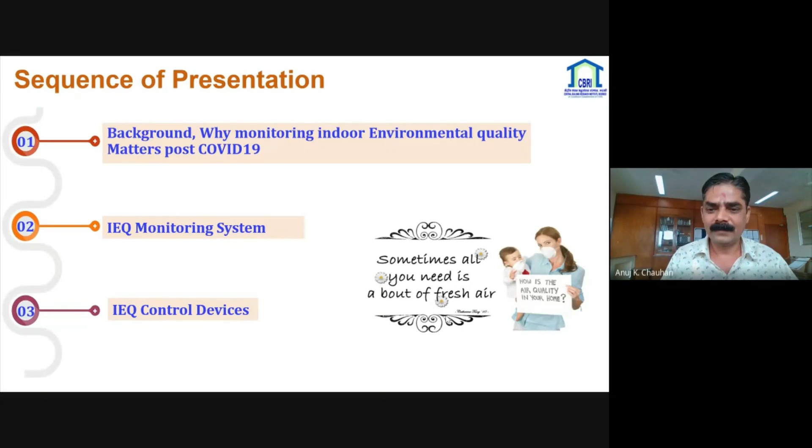Indoor environmental quality and indoor air quality are associated with one another. Indoor environmental quality basically has four main parameters: ventilation, lighting, acoustic, and thermal comfort, and indoor air quality is also associated with indoor environmental quality. If there is poor air quality inside the building, it leads to building-related illness and sick building syndrome. The main issue is safety and health of the occupants inside the building.

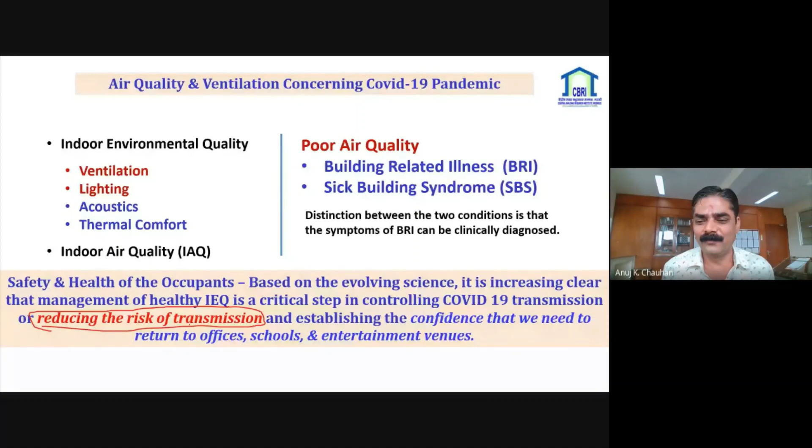It is increasingly clear that management of healthy indoor environmental quality is a critical step in controlling COVID-19 transmission. Our main target is reducing the risk of transmission, because most entertainment venues, offices, and schools were closed for the last 2 years, but the population is not confident about returning to offices, schools, and entertainment venues.

We cannot directly monitor the presence of COVID-19 in the air, but we can and already do regularly monitor a number of factors which affect the risk of viral transmission, such as temperature, humidity, particulate matter, and CO2, meaning air quality. The second issue is how the integration of cleaning and disinfecting practices, ventilation system operation, and indoor air quality measurement can provide a framework for the safe operation and occupation of indoor environments.

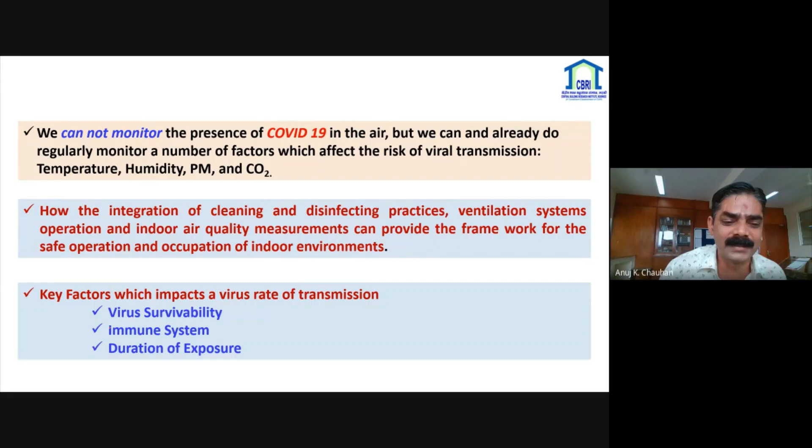The three main key factors of virus transmission rate are: first, virus survivability; second, immune system; and third, duration of exposure. This is basically a photograph showing the link between occupancy and the increase in CO2 level inside the building.

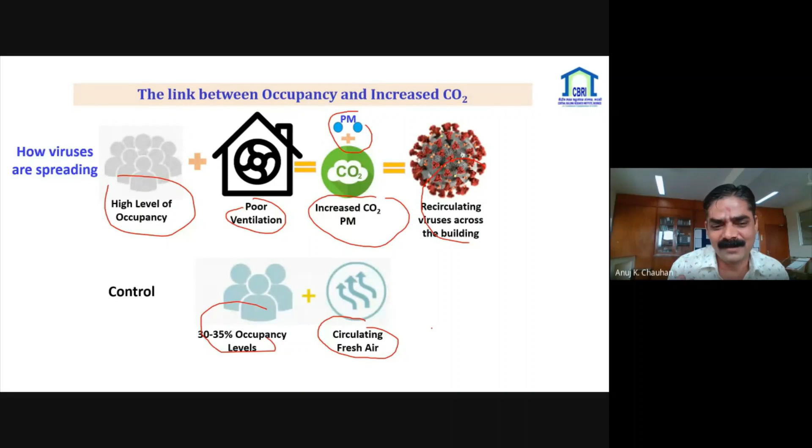It depends on occupancy. If there is high occupancy in the building and poor ventilation, the CO2 and particulate matter levels increase automatically, which then recirculates the virus more speedily in the building. There are two phenomena that are very easy to control the virus within the building: one-third occupancy levels, and circulating fresh air inside the building. These two principles are the main ways of controlling the transmission of virus inside the building.

Regarding air quality, according to WHO, most people spend 90% of their time inside different types of buildings—commercial, residential, and industrial—and approximately 70% of their time in homes. So based on virus transmission, monitoring is necessary based on air quality.

The main factor is that buildings contain a wide range of airborne pollutants that pose a risk to human health, including physical, mental, and social well-being. Therefore, indoor air quality is very important for houses and buildings.

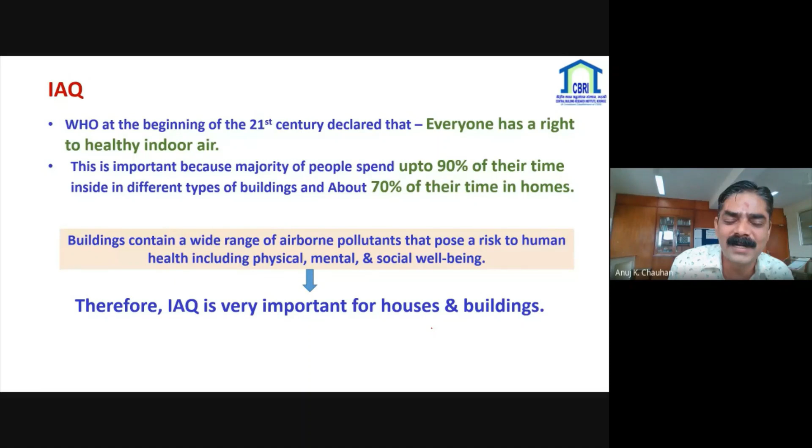This is the health effect based on pollution. Air pollution generates CO, SOx, NOx, ozone, particulate matter, volatile organic compounds, lead aerosol, and these pollutant parameters affect the human body causing respiratory illness, cardiovascular illness, cancer risk, nausea, and skin irritation. Also, water pollution develops bacteria, parasites, and chemicals, and these affect the human body causing gastroenteritis.

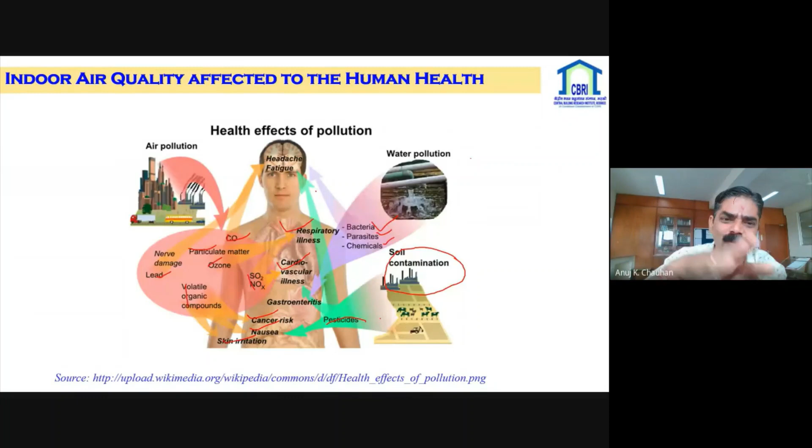Also, agricultural activity or soil contamination develops parasites and causes nausea and cardiovascular illness, and also headache. This is basically how indoor air quality affects human health.

Inside the building, there are so many sources that automatically make indoor air quality polluted with gases, such as carbon dioxide, a product of combustion and respiration—it's not a pollutant at the concentrations found in most buildings, but is an indicator of bio effluents and combustion. Second is carbon monoxide, a product of incomplete combustion, and sulfur dioxide, a product of combustion of fuels containing sulfur, particularly coals. Nitrogen dioxide is also a product of combustion.

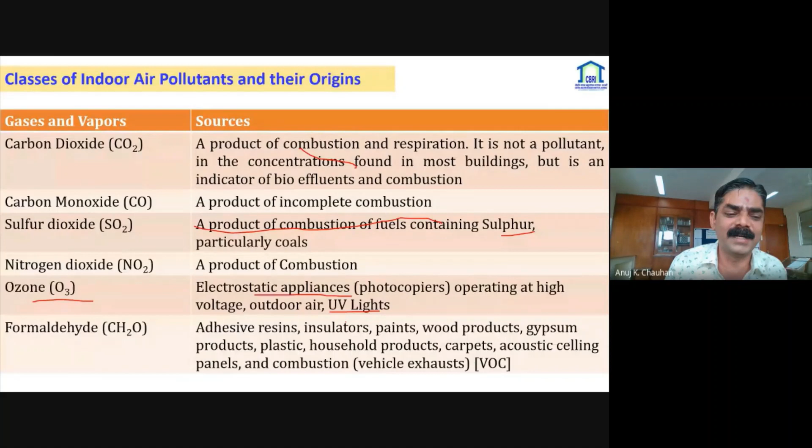Ozone is mostly generated by electrostatic appliances, photocopiers operating at high voltage, outdoor air, and UV lights. Formaldehyde comes from adhesive resins and paint; carpet and acoustic ceiling are also sources that generate formaldehyde. Particulate matter, a product of combustion, cooking, candles, open fires, tobacco, boilers, etc., develops into PM10, PM2.5, and PM1 inside the building.

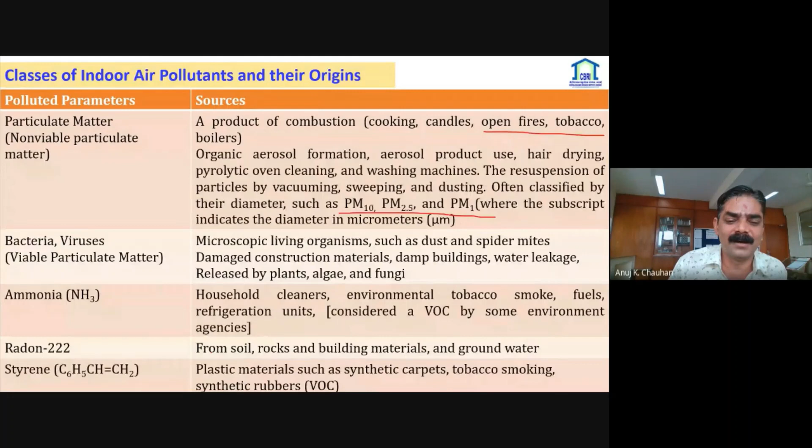This is the acceptable range of the pollutant, because we have defined in the last 4 to 5 slides based on any system, any product. If you want to design a product, you need an input parameter. So these slides are linked to the design, before designing the product or instrument, the pollutant parameter according to the standard. So the range, acceptable range according to the standard: WHO standard, ASHRAE standard, OSHA standard, and EPA, Environmental Protection Agency based pollutant parameter.

So the main parameters are PM2.5, PM10, ozone, total volatile organic compound, CO, CO2, and formaldehyde. This range is defined based on WHO, and a few parameter levels are defined by ASHRAE, and also all parameters are defined by OSHA and EPA.

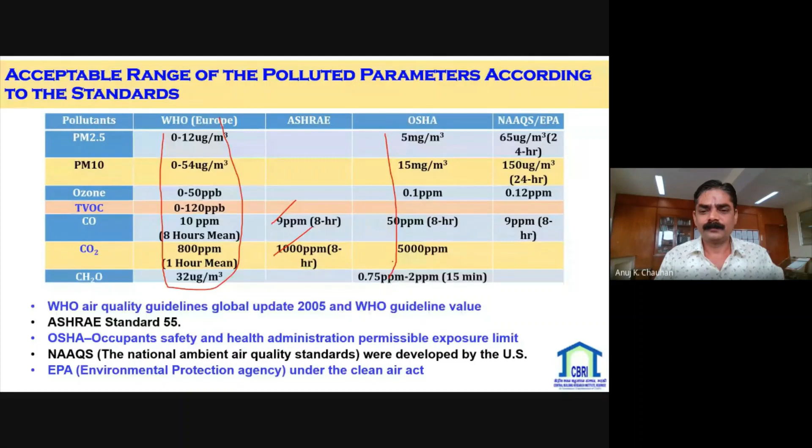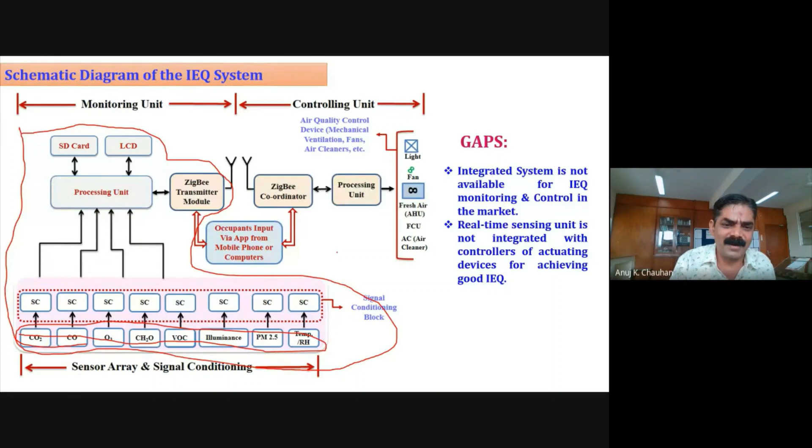Basically, most of the scientific community does not integrate this directly, but we have a necessity to follow the standard or guideline according to the standard. So we have followed the IEEE standard, and based on the IEEE standard, we have defined and already developed this system. This is the STIM model, Standard Transducer Interface Module, and the other is the Network Capable Application Processor.

The STIM model consists of a sensor array and signal conditioning. SC means signal conditioning, integrated with the processing unit, and the transducer electronic data sheet.

Most systems nowadays integrate directly to a micro SD card, but don't save the data directly in bulk mode. But in our research, we have developed a separate sensor module, meaning CO2 data is saved separately to a defined particular space on the micro SD card.

And this is the local display for monitoring the parameter, and this is the transducer independent interface. The transducer independent interface is based on the IEEE 802.15.4 standard. Basically, we have linked here Zigbee communication, and the second part is the controlling unit.

The controlling unit controls the indoor environmental quality parameters based on light, fan, fresh air handling unit, fan coil unit, and air cleaner. And we have followed the IEEE standard for the development of all these, and this is the unique feature of this product.

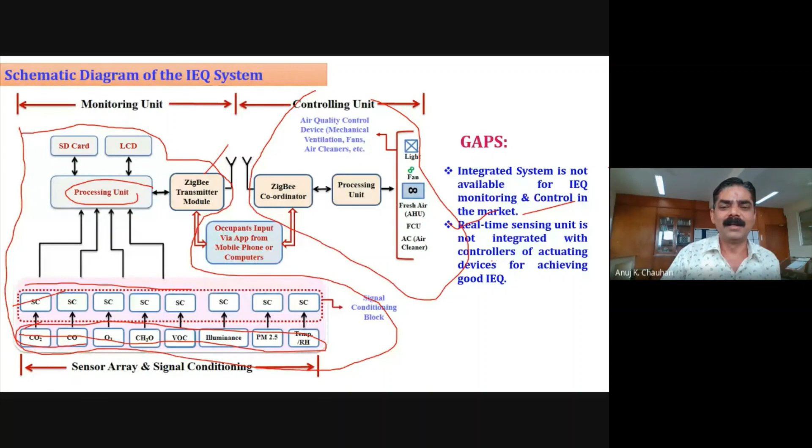This is a sensor array, basically a group of sensors like CO, CO2, SOx, NOx, ozone, total volatile organic compound, formaldehyde, temperature, relative humidity, and particulate matter.

Basically, most gas sensors are transducers that detect gas molecules, producing an electrical signal with magnitude related to the gas concentration. Nowadays in the market, 5 gas sensing technologies are available: electrochemical, catalytic bead, semiconductor, photoionization, and infrared gas sensor.

In this work, we have used mixed mode sensors. So a few sensors use semiconductor technology, a few use electrochemical sensors, and one is the infrared sensor. But we have chosen the sensor based on energy efficiency, based on accuracy, and the main parameter is the response time of the sensor. So we included 3-4 parameters here, and based on these parameters we have chosen the sensor for developing the indoor environmental quality monitoring and control system.

And first, the basics of the electrochemical sensor. Basically, an electrochemical sensor operates by reacting with the monitored gas and producing an electrical signal related to the gas concentration. This principle is common to most of the sensor array. And basically, an electrochemical sensor consists of 2 or 3 types of electrodes.

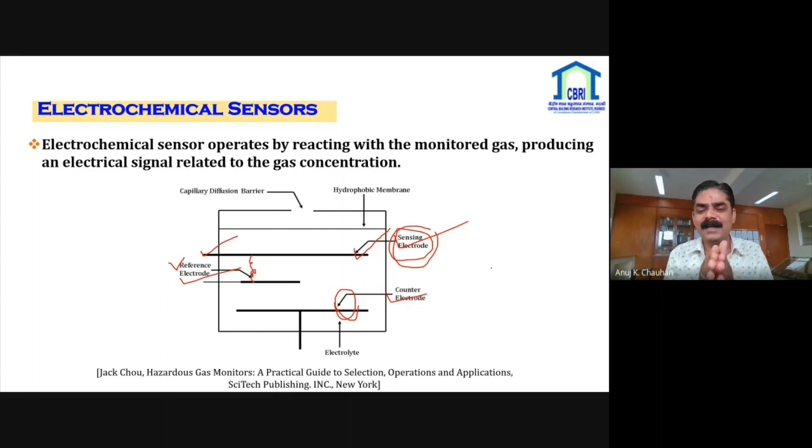This is the basic principle of the electrochemical gas sensor. After some time, sensor output is saturated, then a jumper is made between the reference and sensing or working electrode. Some sensors require a bias voltage applied between the reference and sensing or working electrode, and the sensor is ready to be used immediately in the next situation, otherwise it takes a few hours.

The main advantage of the electrochemical sensor is that it's very linear, with good selectivity, excellent repeatability, and good accuracy. The electrochemical sensor is very specific to a particular gas, with no disturbances or interference from other gases affecting the result, and it requires very little power to operate. In fact, its power consumption is the lowest among all types of sensors.

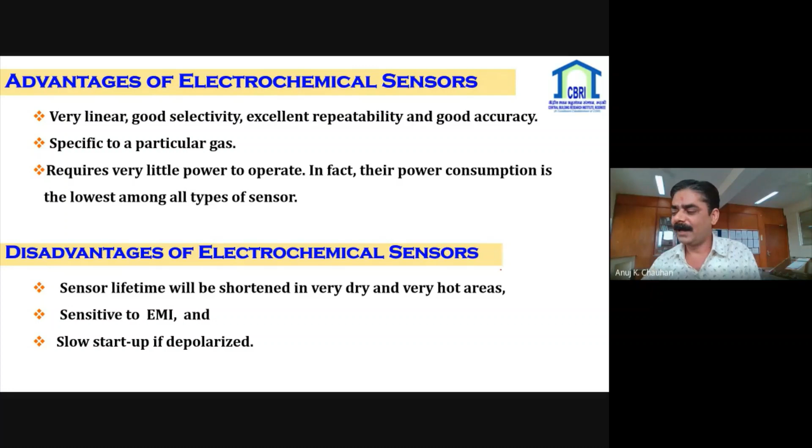The main disadvantage of the electrochemical sensor is a very short lifespan and it dries out in hot areas, and it's sensitive to electromagnetic interference. It also has a slow startup if depolarized.

This is the signal conditioning of the electrochemical sensor. Basically, the electrochemical sensor needs a control circuit. This signal conditioning has three main parts: first is the signal control circuit, second is the current measuring circuit, and third is the JFET transistor connected between the reference and working electrode.

The control circuit provides current to the counter electrode, and balances the current required by the working electrode current.

The inverting input of this IC is connected to the reference electrode because it must not draw any significant current from the reference electrode.

In this circuit, we have used ultra low input bias amplifiers such as OP90, OP296, and LMP7721. These will ensure that the reference electrode maintains a constant potential with less input bias current. In this circuit, the input bias current is less than 5 nanoampere, and in the pico range it is 15 picoampere for the LMP7721.

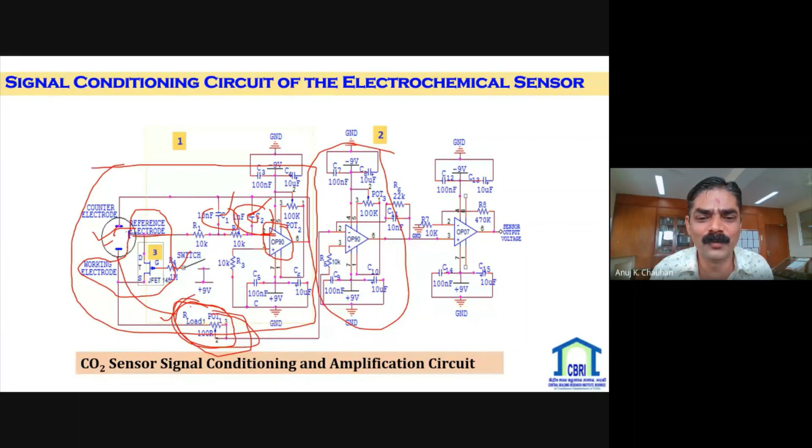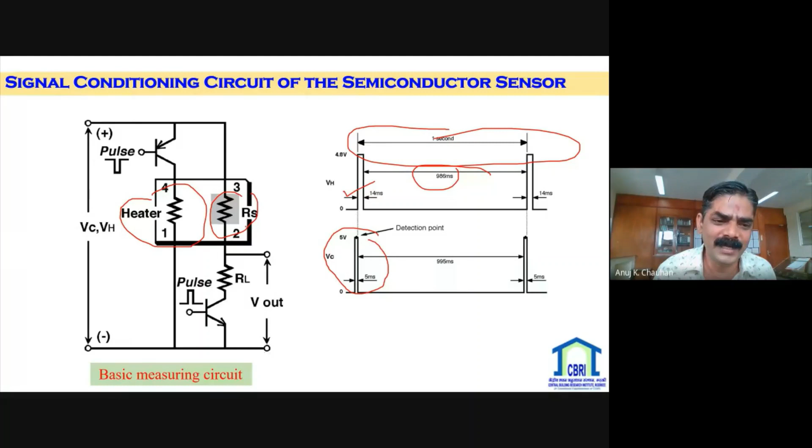Output is measured based on this cycle, and we have developed a simple circuit based on lower power consumption, using a 555 timer. This is the power management strategy.

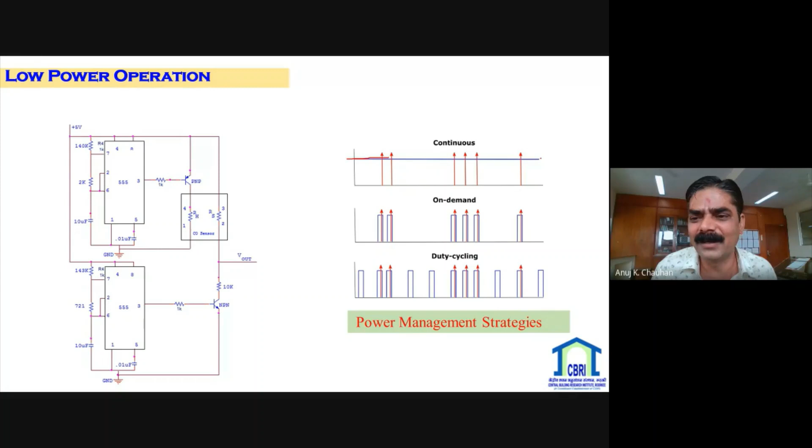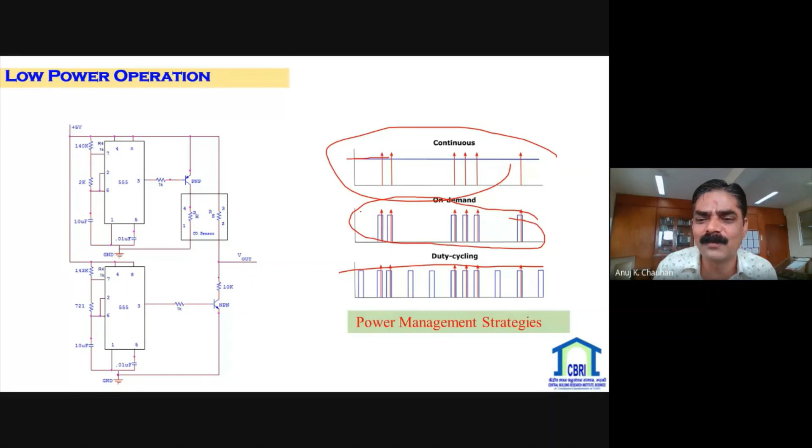If you need continuous data, then it consumes more power. If you record data based on a certain time interval, then it consumes less power in comparison to duty cycle mode, and in comparison to continuous and on-demand based modes.

Basically, the sensor output voltage is in a certain voltage range. Then there is a relation between the sensor output voltage range and the change to ppm range. This is the relation between the sensor output voltage and gas concentration.

This is the power consumption and response time of the developed sensor module, and this is the response time. In this circuit, we have used two models. One is the CO2 D1, which is the electrochemical sensor, with a response time of 5 minutes and power consumption of 1.1434 milliwatt.

The other is the infrared gas sensor for CO2, which consumes 60 milliwatt, more power compared to the electrochemical sensor. Its response time is 30 seconds, since 5 minutes is a very high response time, but 30 seconds is good, though the power consumption is high.

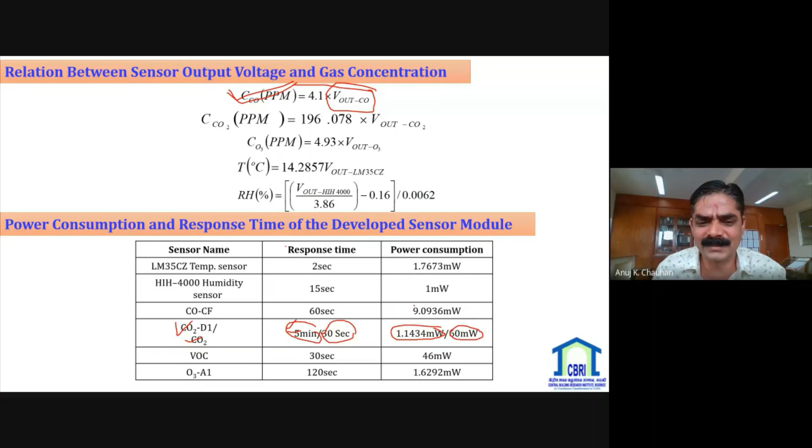After development and integration of the sensor, a calibration is needed. First of all, we have purchased the factory calibrated sensor, but requiring high accuracy at low concentration needs calibration. So 2-3 methods are available. First is the static calibration method which we have used here, and the other is the dynamic calibration method.

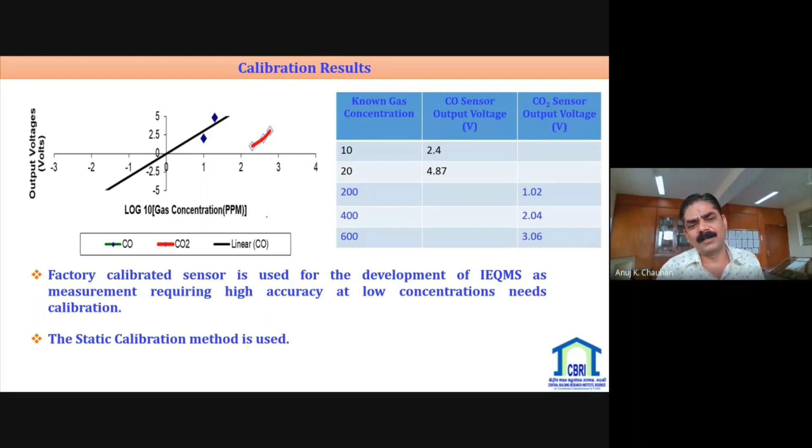In the static chamber calibration method, first of all we define the zero value and maximum range according to clean air or nitrogen. After that, we apply the gas concentration cylinder to set the value of the output. This is the developed sensor module.

This is the electrochemical sensor, and this is the semiconductor sensor, and this is the electrochemical, and one is the infrared gas sensor. Basically, this is the indoor environmental quality monitoring system.

The salient features: the real-time sensing unit is integrated with controllers of actuating devices for achieving good indoor air quality and environmental quality. It has the ability to cater to the diversity of individual preferences through active user engagement and informatics, and currently monitors the parameters of CO2, total volatile organic compound, PM2.5, PM10, AQI, temperature and humidity.

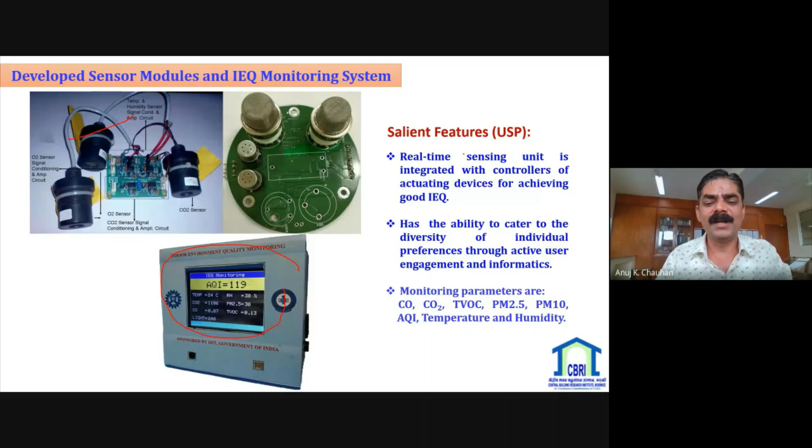Based on the indoor environmental quality, we need a control strategy and control system. So we have applied the control algorithm for indoor environmental quality. Devices have been controlled manually, but there is a need for a fully automatic control system based on occupants' behavior or real-time feedback. First we measure the indoor environmental quality parameters and compare them to the standard value.

If the CO2 threshold value is 400, that is good for humans inside the building. We set the threshold value and give feedback accordingly. Sometimes a faster control to the CO2 level is needed, then the threshold value is set accordingly. This is the intelligent control algorithm decision maker, going to the processing unit, and this is the control unit.

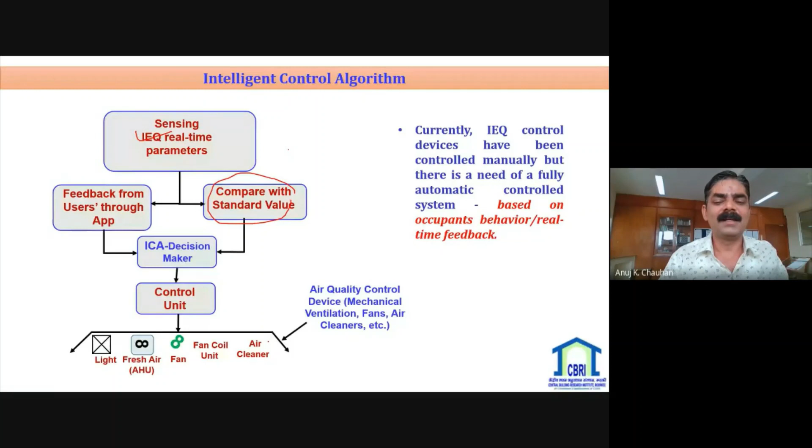This is a basic block diagram of controlling the air quality control devices, like mechanical ventilation, fans, air cleaners, etc.

Basically, we have developed the building controller based on one central agent. Central agent means main agent, main controller, and more than one local agent, because inside the building, fan is one local agent, ventilation is another local agent, lighting is a third local agent.

So there are many agents inside the building. You integrate them one by one to the central controller, and the central controller integrates to the facility manager, while the local agent integrates to the personal occupant through a graphical user interface or any app.

Basically the local agent does the monitoring, controlling and analysis. The local agent is integrated with two-way communication between the central agent and the local agent, and the central agent has two-way communication integrated to the facility manager.

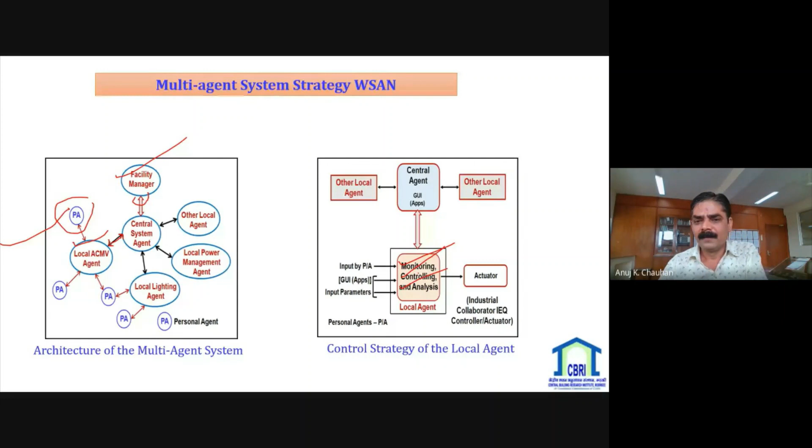Also, before development of the system, we needed to know which technique is good and which is not, based on the comfort index and energy consumption. We chose two parameters.

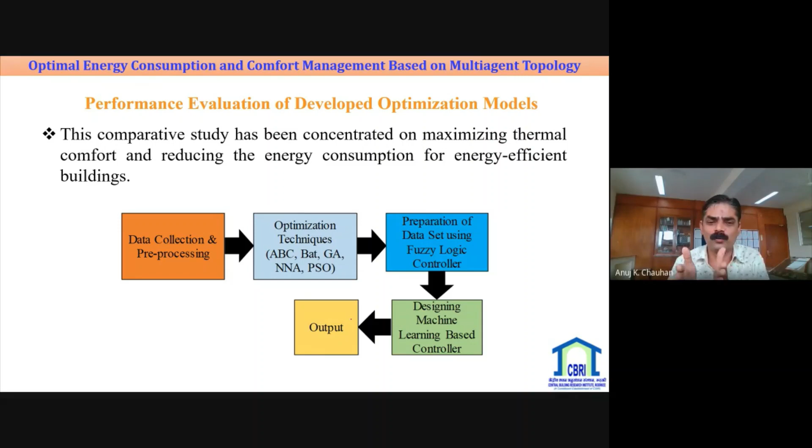Based on this, we applied optimization techniques: ABC, BAT optimization, genetic algorithm, neural network, and particle swarm optimization. Based on this, we designed the fuzzy logic controller and machine learning, and give the output to any controlling devices.

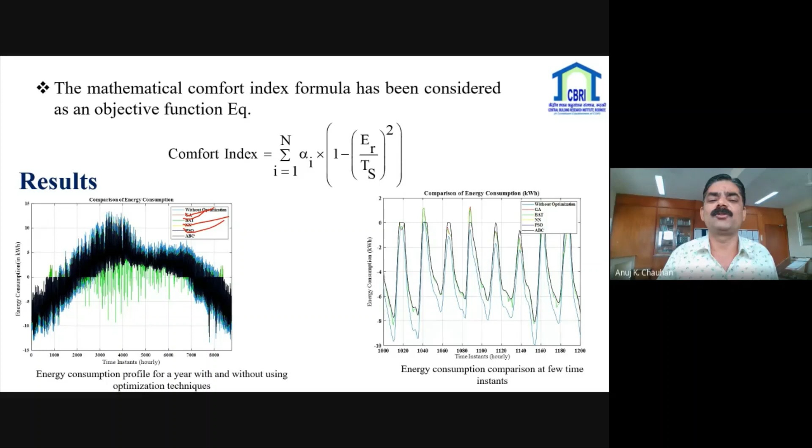This is the result comparing energy consumption of the old techniques without optimization, versus genetic algorithm, BAT, neural network, PSO, and ABC. After that, the comparison is shown in a simple graph.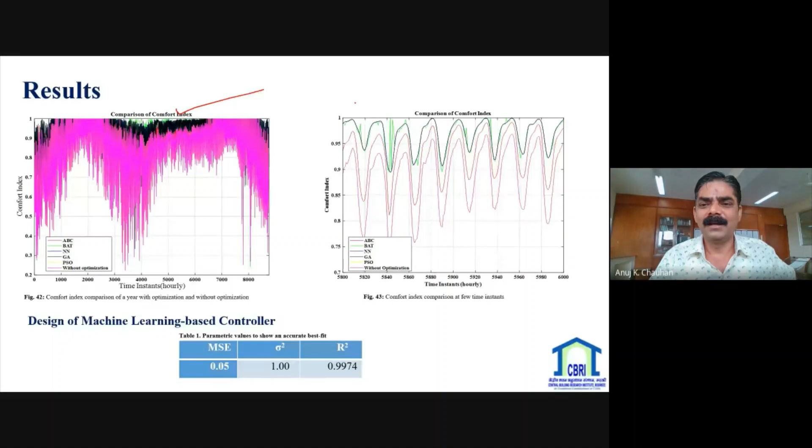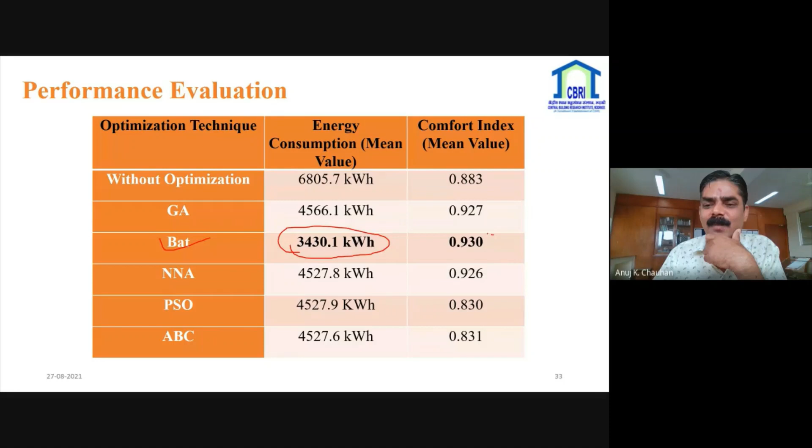Main target is higher comfort index, near one, and lowest energy consumption for the developed system. This is the comfort index based on the time stamp of the old model. We found that the BAT optimization result is good, with this consumption and maximum comfort index mean value.

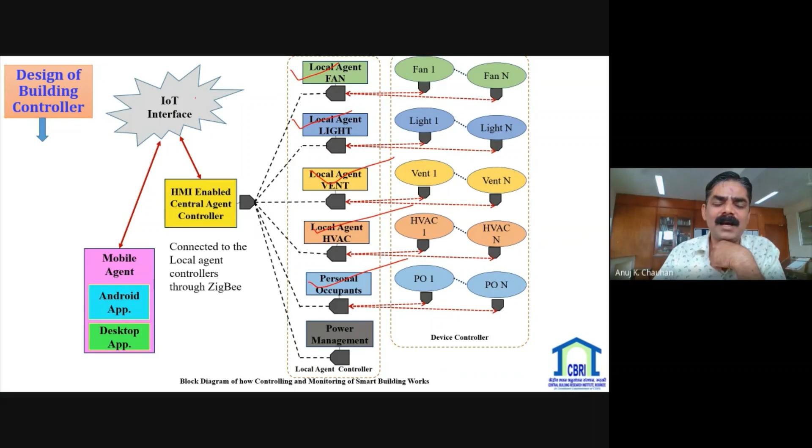This is the designed controller app for all local agents: fan, lighting, ventilation, and central cooling unit, based on personal occupant behavior, also integrated to the Internet of Things for controlling interior or outside the home.

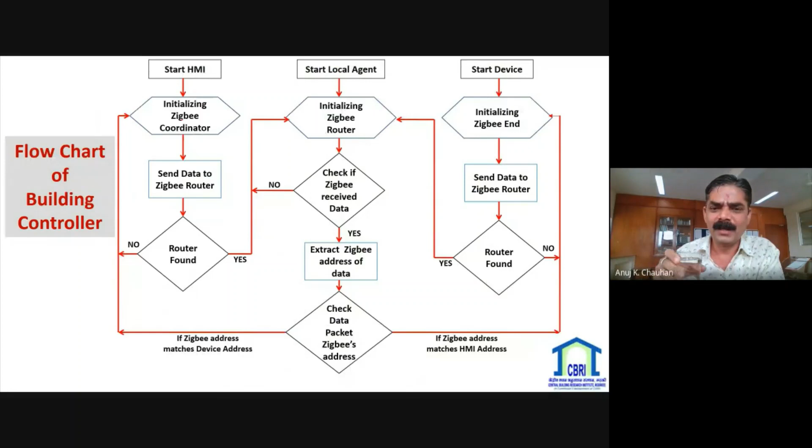This is the flow chart of the building controller, and this is the HMI, human machine interface, enabled to the central agent controller.

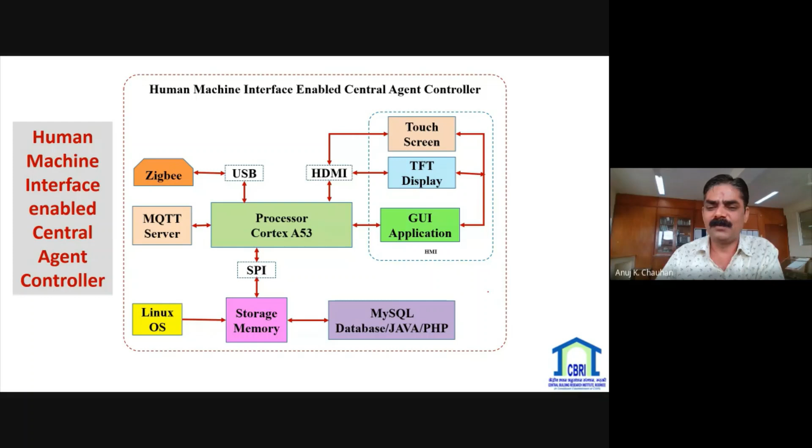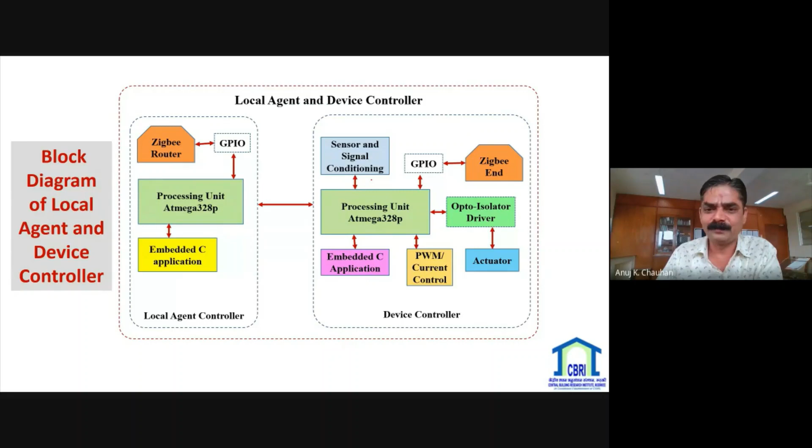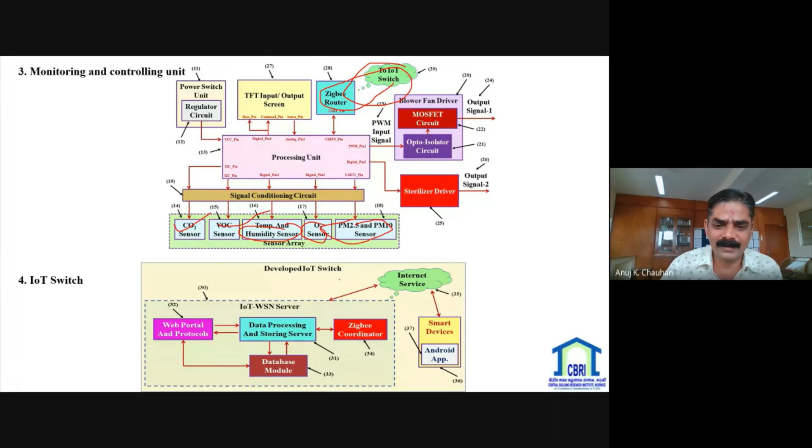This is the air filtration component. In many industries, most sterilizers are used, but here we have used UVC for the first time, based on industry practice.

This increases the ozone level inside the room or building, but after some time we found a few researchers give some statements about this.

The activated carbon filter automatically works as a killer of ozone, and here it generates small amounts of ozone. Then the activated carbon filter kills it out and releases only a small amount into the purified air.

So this is the basic difference in our system: we have used UVC here. This system was developed in 2019, and at that time UVC was used only to kill fungus and bacteria.

This cycle is used for only 10 minutes, 20 minutes, or 30 minutes. Three options are available in this system.

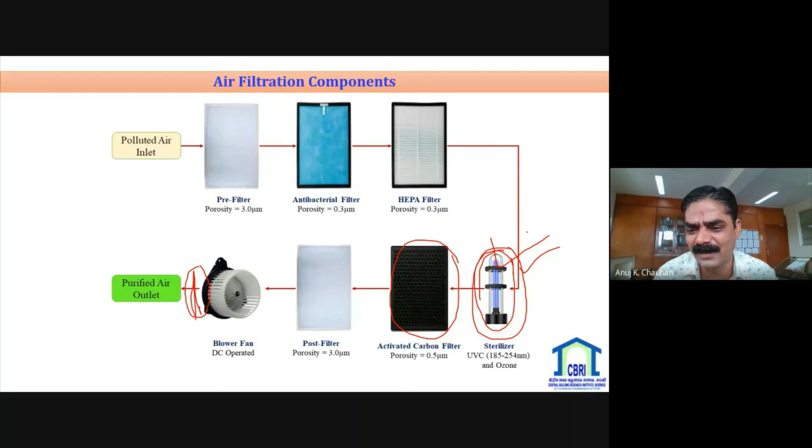This is the flowchart of the developed smart air purifier system with IoT switch, and this is the photograph of the developed system.

This is the app for controlling the system from inside and outside the building, and this shows its characteristics.

This is operated on AC or DC, both options are available, and it measures PM2.5, PM10, VOC, CO2, ozone, temperature, and humidity.

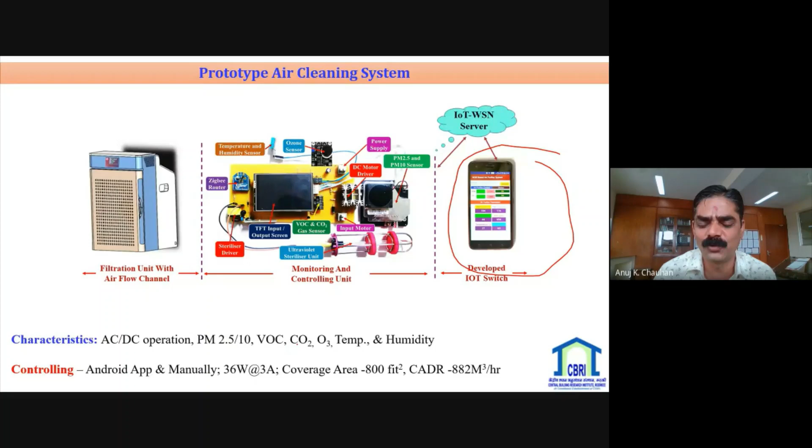This is the photograph of the monitoring device product, with on and off manual control, UV sterilization on and off, and a timer set for 2, 4, or 8 hours.

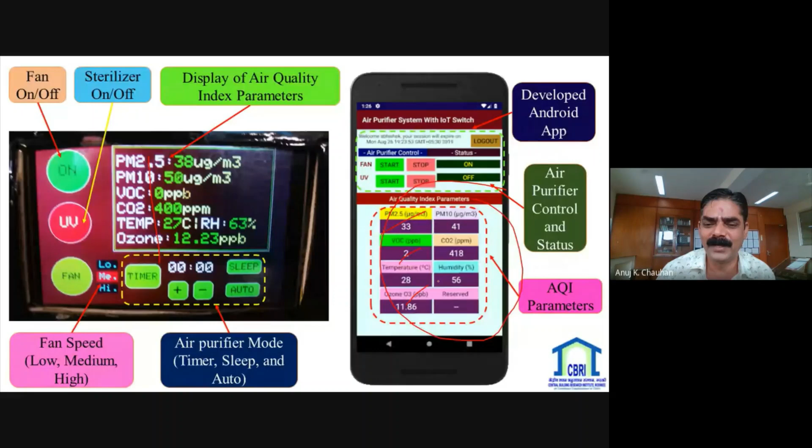Also the fan has low, medium, and high settings. This is the monitoring parameter display, and this is the app for controlling the device according to your monitoring parameters, and this is the air quality index.

This is the feature set of the developed system: CADR, remote control, sleep mode function, fan speed, auto function capability, air quality sensor, real-time monitoring, and filter change indicator.

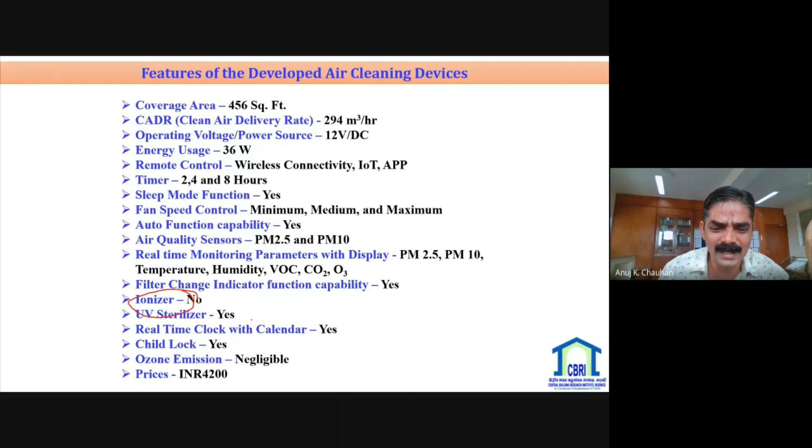We have also enabled filter blockage detection, which automatically indicates to the device to change filters in a timely manner. It includes an ionizer option (not included) and UV sterilizer (included), along with ozone control and child lock, among other features. This is the CFD analysis of the air purifier system.

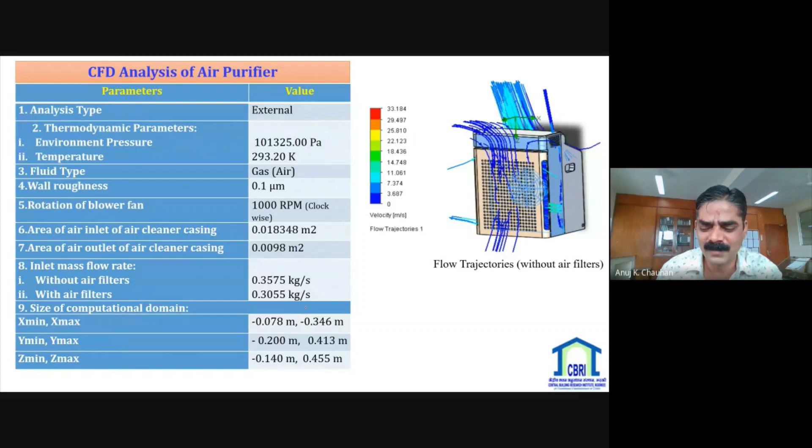This is the product photograph of the air purification and air cleaning devices, and this is the small-scale prototype available in our building. Also, 2-3 products have been given to DST, the Department of Science and Technology.

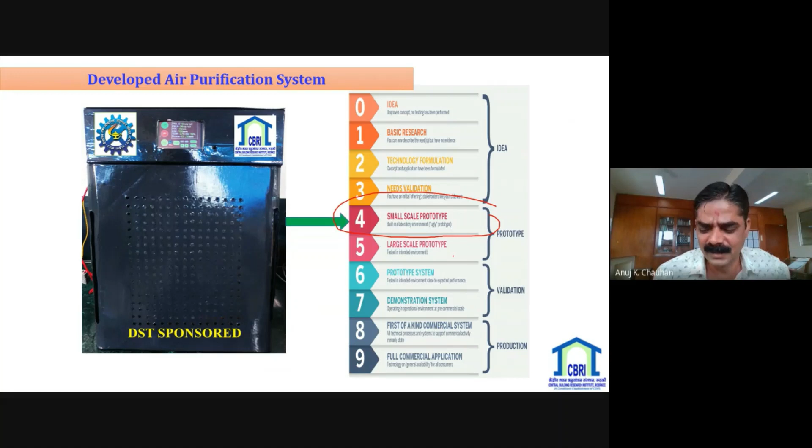Also, another device is the ventilation controlling device. Currently, the ventilation system is controlled manually and works continuously, meaning the exhaust fan operates continuously at the same RPM and consumes more power.

The control mechanism and ventilation system is based on ASHRAE standard 62.1-2016, ventilation for acceptable indoor air quality.

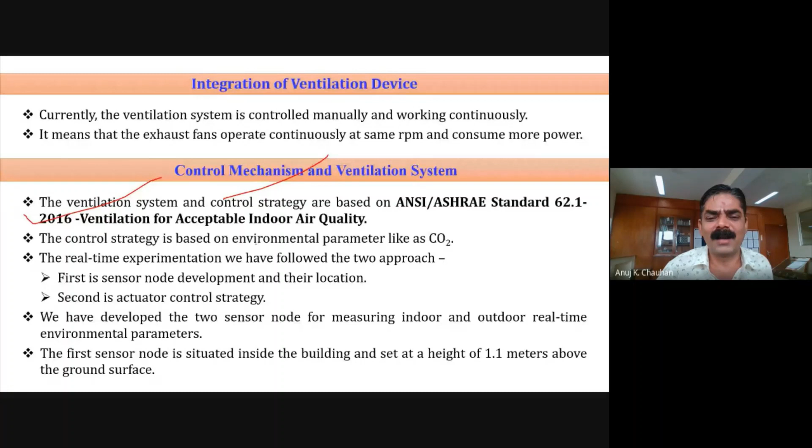The control strategy is based on environmental parameters like CO2. For real-time experimentation, we followed two approaches: first is sensor node development and their location, second is actuator control strategy.

So first of all, we developed two sensor nodes: first is inside the building, and second is outside the building.

Inside the building, the sensor node height is 1.1 meters. If your building height is 8 meters, 10 meters, or 50 meters, then 8 meters is good for the second sensor node placed outside the building.

Both sensor nodes transmit the signal to the developed actuator through ZigBee communication, and after a 10-minute interval we measured the real-time data and differential concentration.

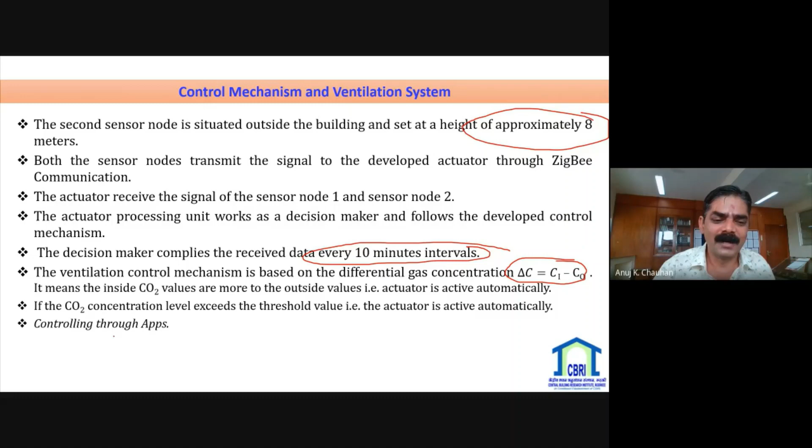Based on the CO2 level, we set the ventilation on and off, also controlling through the app by setting a threshold value. If your value increases above 400, then the ventilation system automatically turns on.

We have also set here measuring the optical RPM sensor, airflow sensor, and vibration sensor. 3 sensors we have used here because after some time the exhaust fan is working properly and not working. Then we have tested based on this data smoothly.

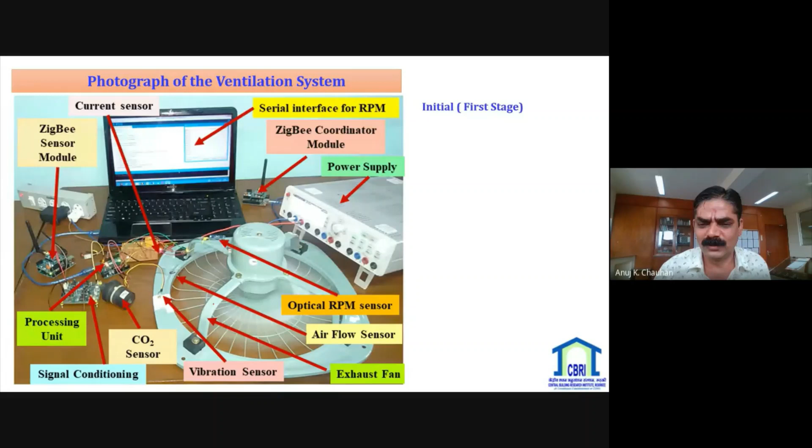Also, if at night occupants or a human is sleeping inside the room and there's a sudden change to the CO2 level inside the building, then the last two slides' work is not proper, and it causes failure to the system. So we have designed, based on this data, a fuzzy controller using CO2 sensor, airflow sensor, zero crossing detection circuit, and triac driving circuit to design the fuzzy controller.

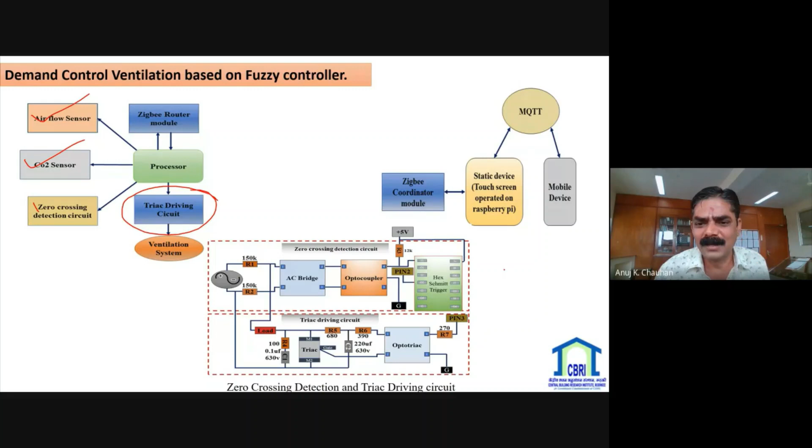This ventilation system is integrated with the local agent and central agent and controlled through the app. And we have checked the four controllers.

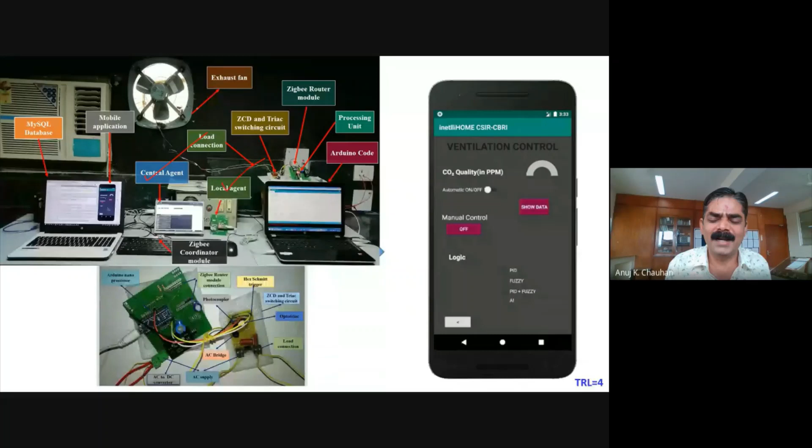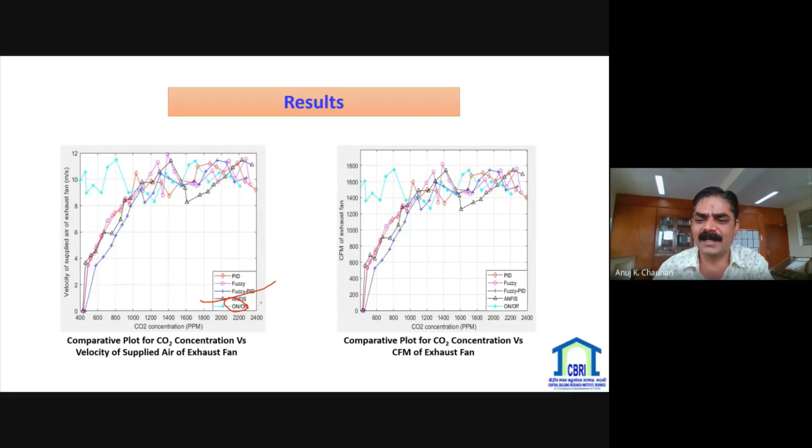Four controllers: PID, fuzzy PID, ANFIS meaning neural network based, and manually on and off. So this is the comparative result based on using different techniques for development of the ventilation system.

This is the comparative table. So we have received the result that ANFIS is good compared to PID, fuzzy PID, and on/off.

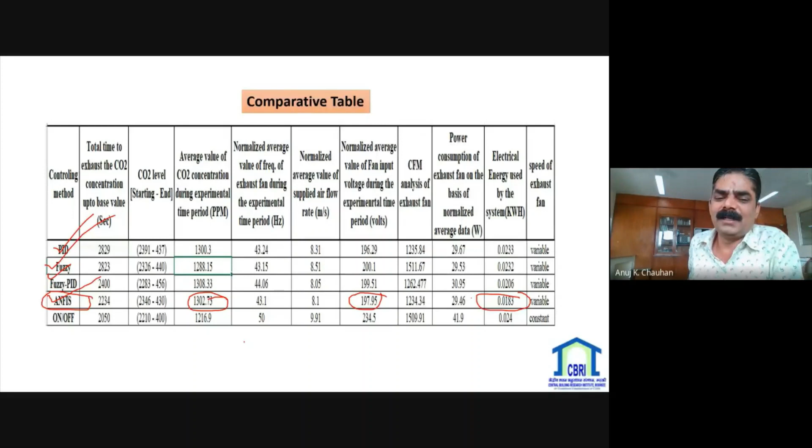They consume less power compared to this, kilowatt hour, and normalized power consumption is this, and the normalized average value of fan input voltage is at this, with concentration of approximately 1302.73. Another problem is that indoor environmental quality has 4 main parameters.

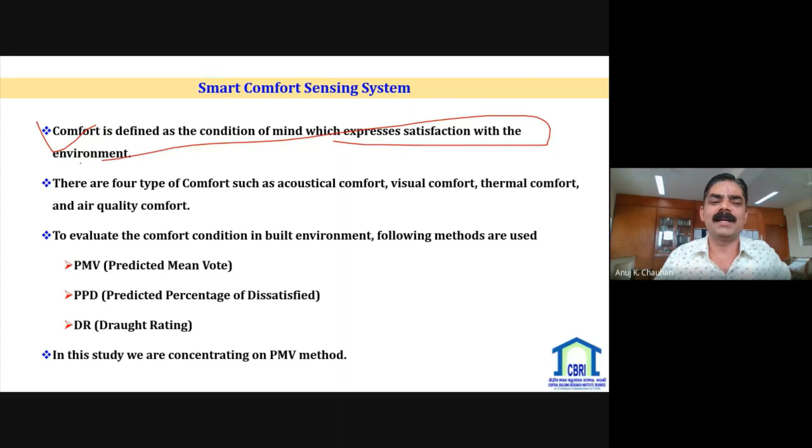Basically, thermal comfort is a condition of mind that expresses satisfaction with the environment. There are 4 types of comfort: acoustic, visual, thermal comfort, and air quality comfort. To evaluate comfort conditions in a built environment, methods used include PMV, PPD, and draught rating. In this study, we have used the PMV method.

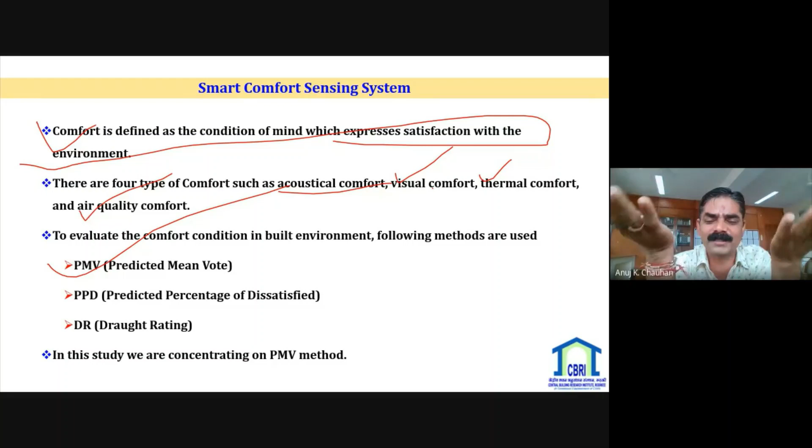First of all, Honeywell around 1970 developed the thermal comfort sensor, TY4700, and they considered 3 real parameters. First is monitoring 3 real-time environmental parameters such as air temperature, radiant temperature, and air velocity.

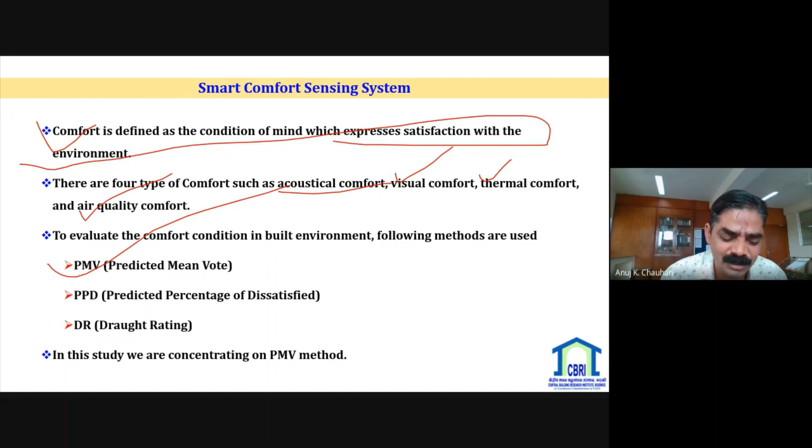Based on these 3 parameters, we predict the thermal comfort sensation point scale, and also consider 3 more parameters: clothing insulation, metabolic rate, and activity level, according to ISO 7730.

But here we developed based on 2 approaches. We used a subjective approach based on questionnaire-based study, and an objective approach based on ASHRAE and ISO standard calculation procedure, using an adaptive prediction formula for PMV estimation.

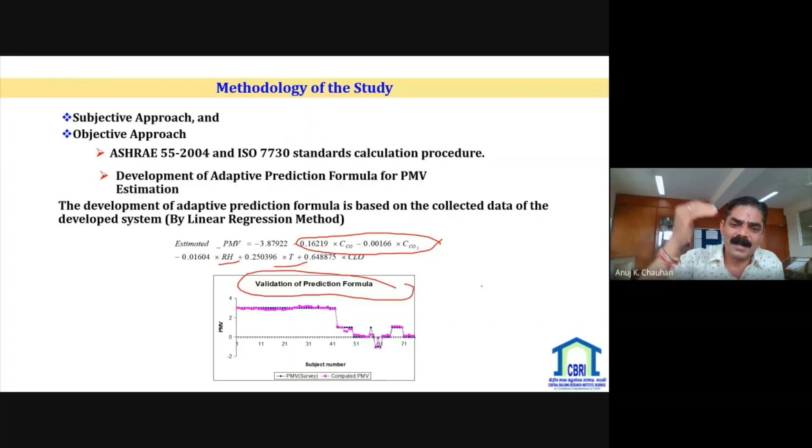We included 2 terms: CO, CO2, and temperature, relative humidity, and validated the prediction formula. First of all, we developed this formula from 45 days of measured data, and after the next 45 days we validated this formula.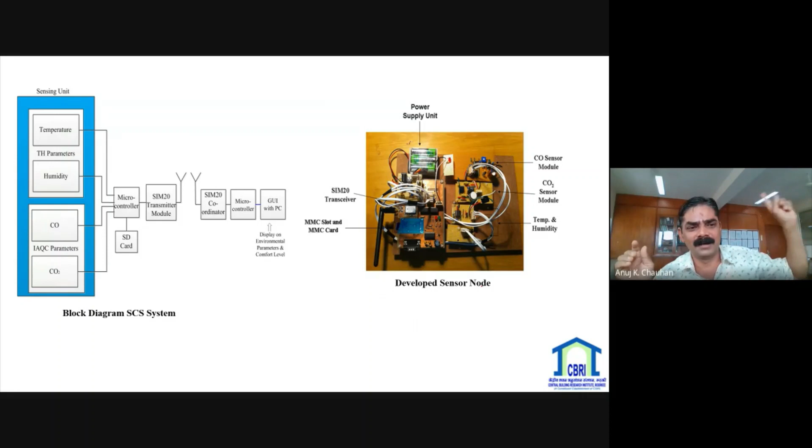This is the hardware developed system. Inside the room we placed 5 sensor nodes: one at each of the 4 corners and one at the center point, at a height of 1.1 meters, measuring data according to this diagram: temperature, humidity, CO and CO2.

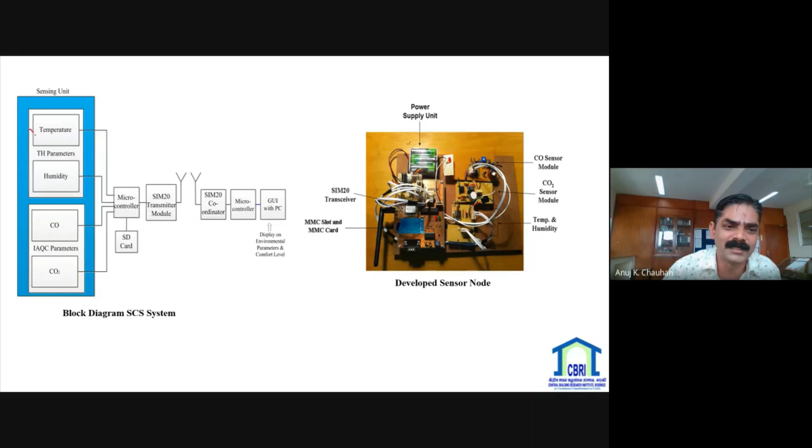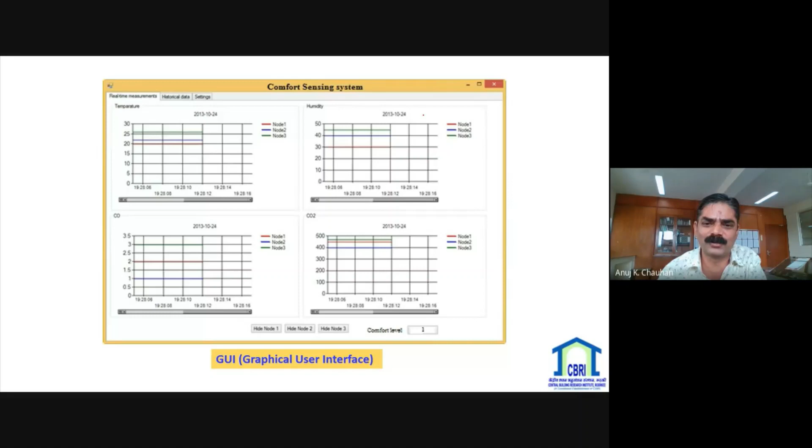According to this system, one sensor node is here, and this is the graphical user interface of the smart comfort sensing system for real-time monitoring of temperature, humidity, CO and CO2.

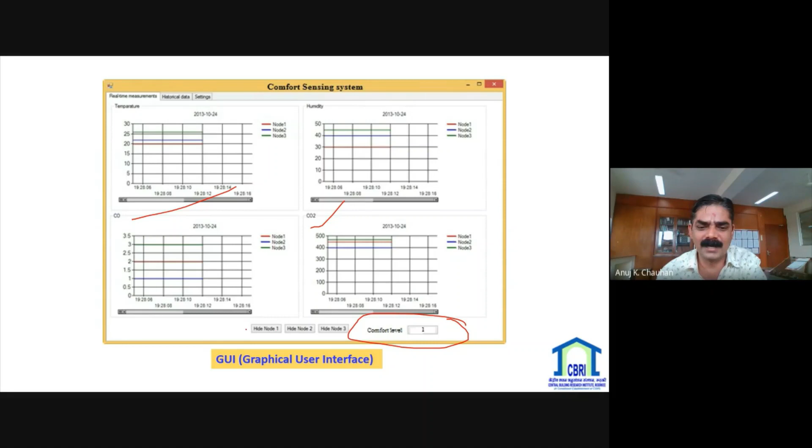And this is the comfort level. Here is the node 1, node 2, node 3 data. This is one node's data, and this is the final result we received. This result is very close to this value.

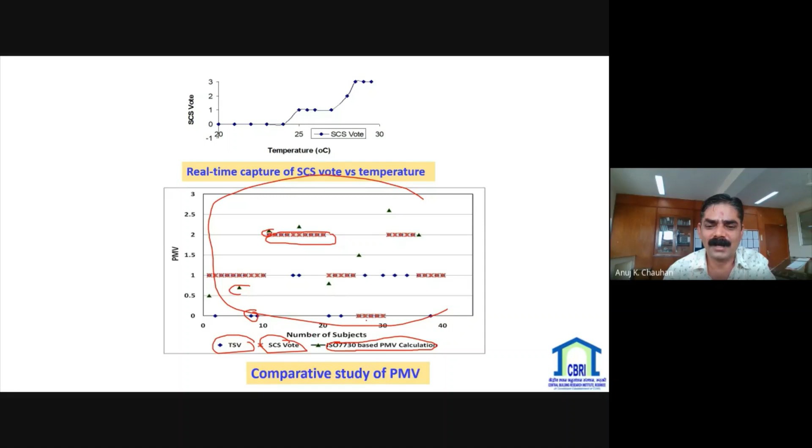Meaning the TSV, thermal sensation vote, or smart comfort sensing vote results are the same but differ from the ISO based PMV calculation, because ISO does not include the CO and CO2 air quality term, but the TSV thermal sensation vote and SCS vote consider air quality, CO and CO2 gases. Thank you.